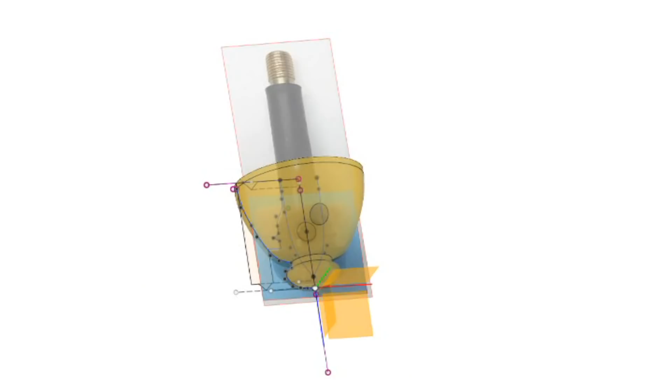In the last video, we were able to understand tire pressure sensors and also hack their protocol using an SDR radio. Today, we will continue towards our goal to get a gentle curve in Grafana and alert the brewer with his smartphone if the pressure is too high.

Because if this happens, the bottles can explode and create a big mess. And it will not only be one bottle, as one of my viewers wrote. All bottles exploded, one after the other, when he was a child and he still vividly remembers that event.

Most monitoring solutions look the same: sensor, wireless communication, data storage, visualization, connection to an alarming system like email or Telegram. And this is precisely the way we will go.

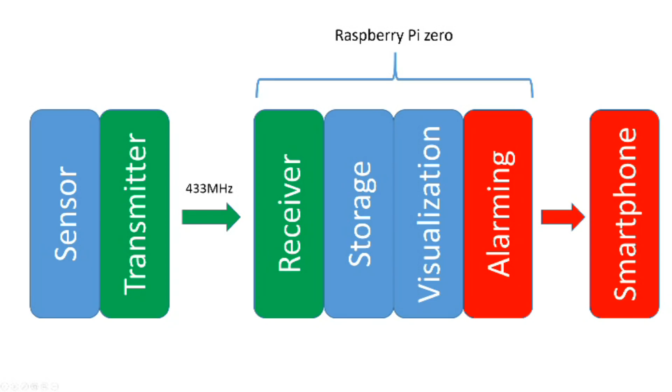Fortunately, we already have a solid base. In video number 255, we built a Raspberry Pi image consisting of Node-RED, InfluxDB and Grafana. And in video number 261, we hacked the TPMS sensors.

But first, what is the problem we want to solve? According to How to Brew, beer is brewed in these phases. Malted barley is soaked in hot water to release the malt sugars. The malt sugar solution is boiled with hops for seasoning.

The solution is cooled and yeast is added to begin fermentation. The yeast ferments the sugars, releasing CO2 and ethyl alcohol. When the main fermentation is complete, the beer is bottled with a little bit of added sugar to provide the carbonation. Here, the refreshing CO2 is produced.

For phase 1 to 4, you get sophisticated equipment and automation using Arduinos or Raspberries. We will not cover that part. Step number 5, however, is still a very conventional process. The normal pressure goes up to around 2 bar. If you made a mistake, much more pressure can be created.

You find different solutions for the measurement of the pressure, also homemade ones. They are sometimes quite innovative, but none is electronic, none is wireless, and none is connected to a remote monitoring or alarm. In short, IoT did not arrive here in the deep cellars of the homebrewers. We want to change that.

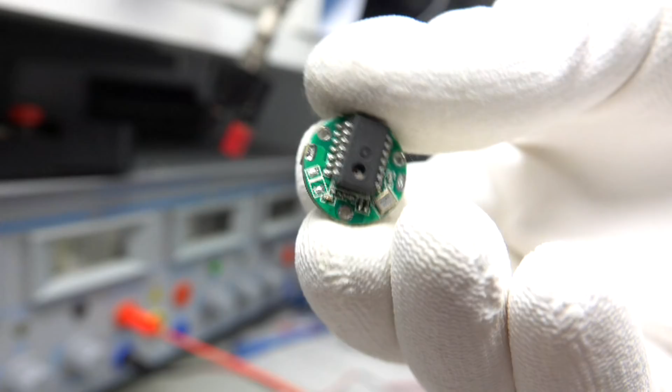But I do not spare any effort for my viewers. I have to admit, finally I discovered 3 hidden screws which would have made it easier. Shit happens. We find one big chip made by Infineon.

It is an SP37, specially made for such TPMS systems. It has everything on board: pressure, acceleration, temperature and voltage sensors, an MCU, a 433 MHz transmitter, and a receiver for 125 kHz.

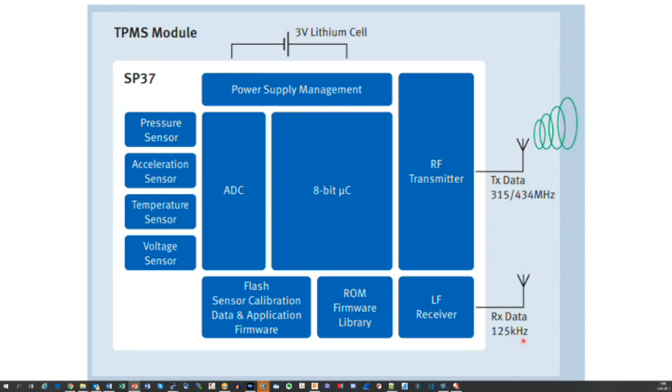The chip can send ASK or FSK signals and has to be programmed by the manufacturer of the sensor. This is why we see so many different protocols.

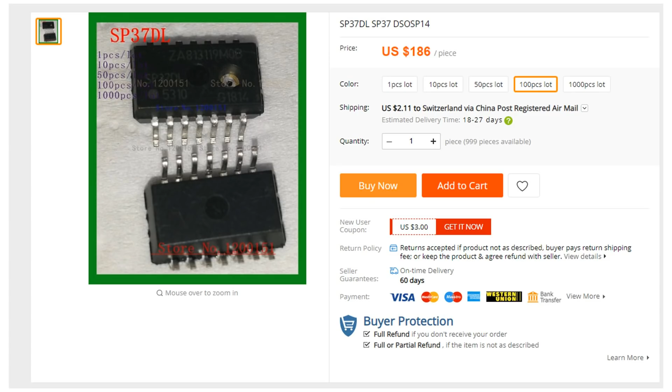The pressure and acceleration sensors are both so-called micro-electro-mechanical systems, or MEMS sensors. MEMS sensors are made of silicon and can be integrated on the chip. This is why such a complex chip is so cheap, less than $2 in quantities of 100.

And they are exact, plus minus 7 kilopascal, which is 0.07 bar. I'm sure this is way more precise than these mechanical instruments.

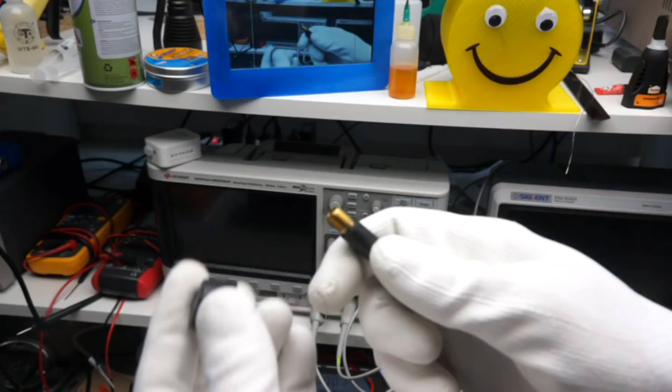Only very few additional elements are needed. Unfortunately, there is no space for a decent antenna for 433 MHz, so they only work at short distances. A coil to receive the 125 kHz signal is not implemented at all. These external sensors are mounted on a tire valve.

In the last video, we found out that they only transmit if they detect pressure changes. This is precisely what we need, and I thought I just have to mount such a sensor on an empty bottle. This was a big mistake, as we will see. It took me many days and nights to discover that getting something watertight is much more straightforward than getting something airtight.

My first idea was to use a bottle with a thread for the cap. I thought a thread is easy to manufacture and stable. Fortunately, I had this bottle of wine in the cellar which fulfilled my criteria. I have to confess that it was full and, in the name of science, I had to drink it before I was able to start.

This was the first evening of many. This evening was nice, but not very productive, if you know what I mean.

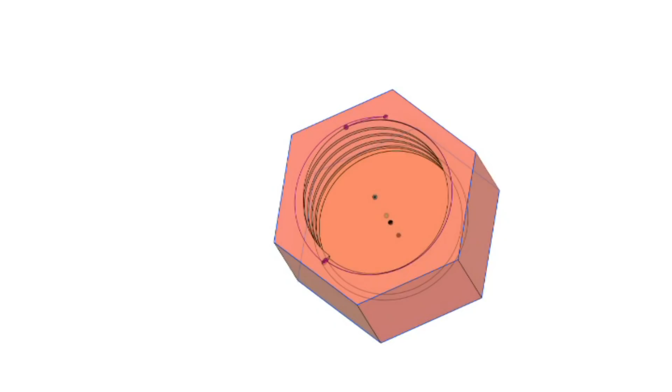The next day I discovered that these wine bottles do not use a standard thread supported by Fusion360. So I had to learn to build a thread using a coil and some black magic. If you know how, you can create all sorts of threads with Fusion360. Google and YouTube help you to find a tutorial. In the end, it worked.

I remembered that my brother is in the car tire business and he gave me a few of his valves for tubeless tires. The hole on the top of the bottle was big enough for the valve and I made a snugly fitting hole in my 3D printed cap. Now I used my bicycle tire pump to bring some pressure inside the bottle. I immediately discovered that the thread was leaking like hell.

The first fail. Then I looked at how other people solved the issue and found these beer bottles with this ancient bugle cap. They have quite a revival here. So it was easy to get one. And you're right, you cannot buy them empty. But as a nerd, I knew how to solve that problem.

Fortunately, a bottle of beer did not have the same devastating effect as the bottle of wine last night. Maybe it even fired my imagination.

I printed a new cap which resembled the white part of the bugle cap and used the round red rubber sealing. And the first cap was tight. I was able to create pressure, mount my sensor, and the pressure remained a whole day.

Then I showed my solution to brewer Reto. He was not amused. Real brewers do not use wine bottles. Their bottles either use this bugle or a crown cap. But for sure, no thread. So my whole work was down the drain and I had to start over.

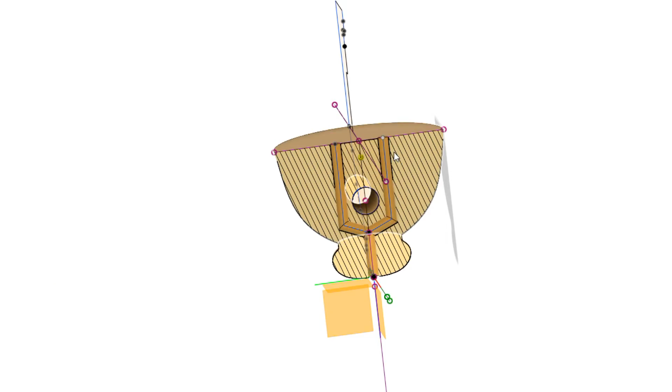I thought that the principle of the bugle cap would work for me too and printed a hat which was very similar to the one I bought. I had to mount the valve above the cap and transfer the pressure to the valve. Because of this metal wire, I had to create pressure holes around it. Very cool if you have a 3D printer.

At least this was what I thought when I was sitting in front of Fusion360. This concept had two parts, the cap and the holder for the valve. I glued the two together, first using superglue. Usually superglue is quite good with PLA.

Unfortunately, this was the next failure. This glued joint leaked. Not a lot, but way too much for a decent brewer. The next fail. I tried with another glue. Same effect. I tried to add better surfaces. It did not help. This joint was not tight.

Then I changed the strategy and added sealing paste. The brand was quite promising: Fix All. It is a very sticky material. This one was tight, but it also clogged the pressure holes. It really fixed all. Next failure.

In the end, I was able to apply it with caution and I got an airtight version. Only to discover that the bottom of the cap also leaked. Because 3D printed surfaces never are entirely flat, air found its way out. I was desperate because I had no idea how to solve this problem. But I had promised a solution for Monday.

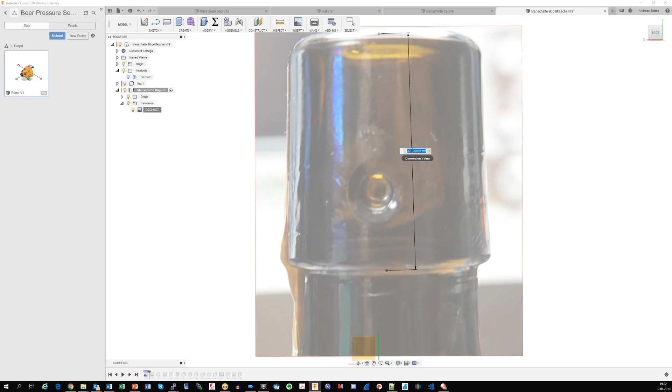Then I calibrated its size. Now I had the model of the rather complicated bottleneck inside Fusion360. I started to sketch the contour using lines and the spline function.

I measured the most critical point using my caliper and added a dimension to be sure. Now I only had to revolve the outline and ready was my sleeve. Tight like the jeans in the 70s.

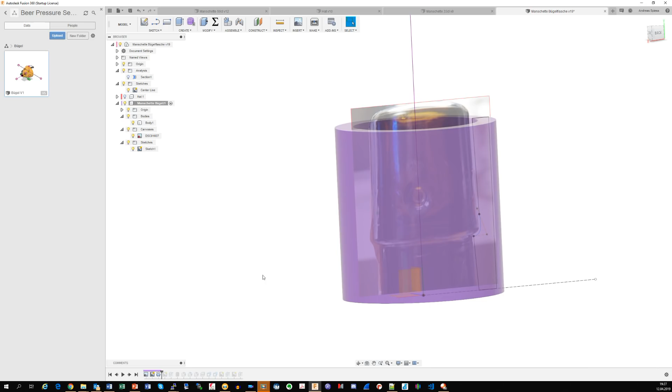On the outside I added a thread. This is an incredibly cool Fusion360 function. You just select the surface and Fusion360 suggests you a thread. For 3D printing, we choose the loose fit.

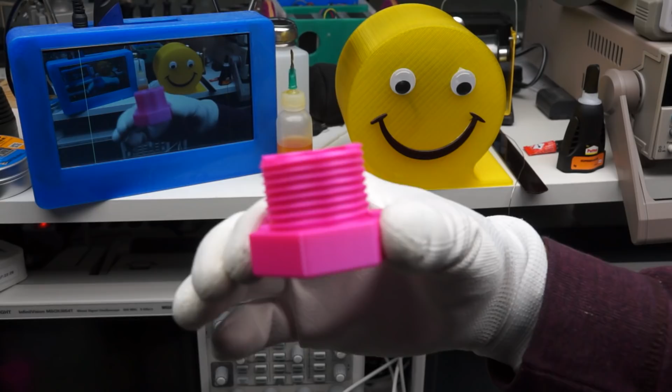But how the hell can I mount this thread to the bottle? No chance from the bottom and no chance from the top. So I had to cut it in half. This is only one command in Fusion360. Now I have two bodies and I easily can mount them.

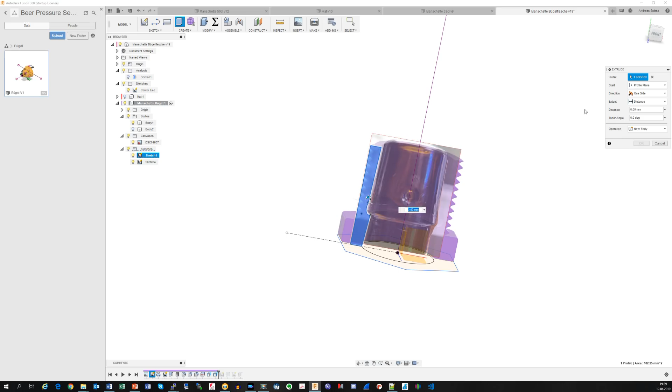But I wanted to add a little leeway. Another cool function helps here: Press Pull. Just select the surface and choose the distance. Fusion360 does the rest. A miracle for me.

The final part looked like that. It was easy to mount and my bottle had a thread. I only had to use my cap idea from the beginning of the project.

Now it started to become at least a little fun, also because I was now officially allowed to drink beer in my lab. I told my wife that I need empty bottles for my experiments.

After printing the cap, I discovered that the opening of the beer bottles is much smaller than the ones of the wine bottles. The valve did no more enter the bottleneck, and the wine bottle principle did no more work. Again, I was not amused and went to bed.

As usual, important discoveries are made by Mr. Coincidence. When my colleague came to discuss our bicycle trip along the Danube River, I showed him my newest designs to complain about how I miserably failed.

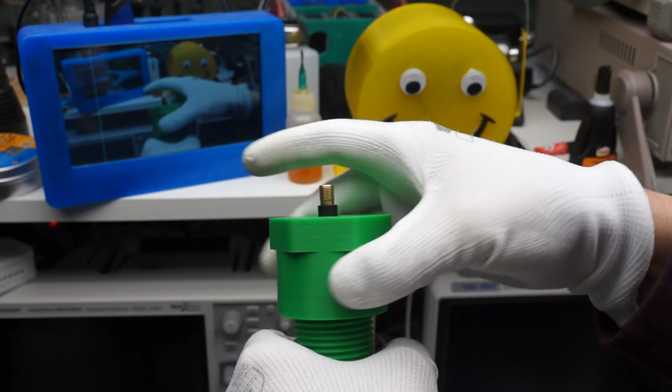I tightened the cap with the valve hard because I was angry about my failure. When I removed the cap, the valve was sitting extremely tight in the opening. A quick test showed that it was also airtight up to 3 bar. I did not want to go higher to avoid an explosion.

So the solution was way simpler than I thought. Just press the rubber of the valve on the opening of the bottle. Done. Now you can write in the comments that I'm stupid and you saw this simple solution right at the beginning. I have to believe you, because all simple solutions are apparent when they are discovered.

Reto was ready with his beer, and I visited him in his lab in the basement. I have to admit, my lab looks nicer. But the products Reto produces taste much better than mine.

He already filled the whole batch and left the amount of beer for 2 bottles. We filled them without forgetting to pour a little sugar into the bottle first. Then he closed one bottle with my sensor and the other one with his mechanical pressure sensors for comparison.

In the beginning, no pressure was shown on both sensors because it does not increase fast. So we had enough time to drink one of his tasty IPA beers.

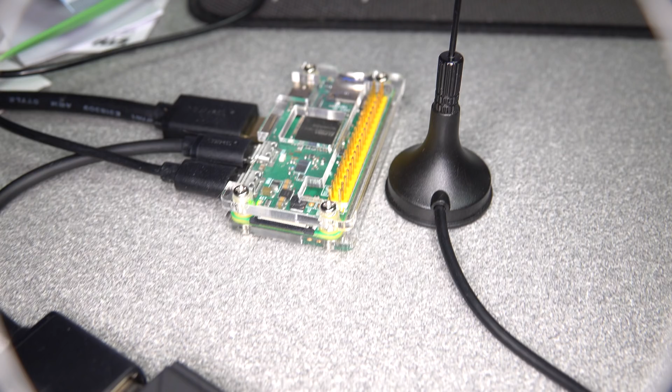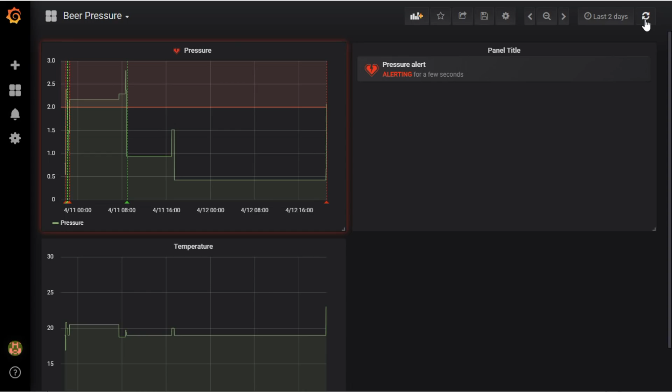We still have to go a long way till our software-defined radio works on a Pi Zero, is hardened so it survives all kinds of crashes, reports the results into InfluxDB and Grafana, and alerts us via mail or telegram. Stay tuned, because this video will be precious for all types of projects.